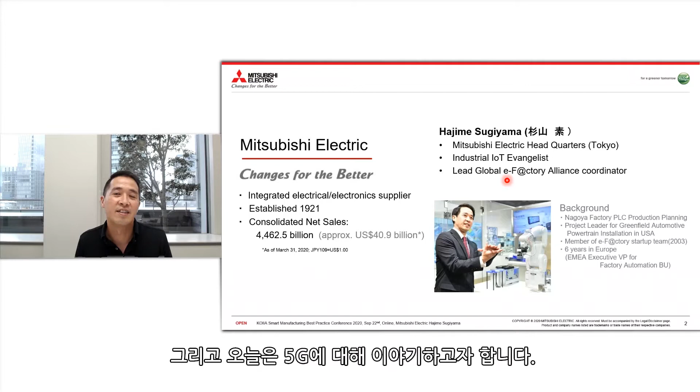First, a short introduction of my company. I work for Mitsubishi Electric, an integrated electrical electronic supplier, and I am from the factory automation division. My name is Hajime Sugiyama. I'm from Tokyo headquarters, and I'm what you call an industrial IoT evangelist. It's my job to talk about emerging technologies and how they impact factory automation, like big data, AI, the cloud, data analytics, and today I'm going to talk about 5G.

I'm sure everybody has heard a lot about 5G and the endless possibilities: wide broadband, low latency, the ability to connect multiple devices. It's really, really exciting, and I think it's going to have a big impact on the factory floor as well.

This is a factory manager's wish list, what he wants to change in the factory. And always, the factory manager has wanted to get rid of wires, because there are so many wires in the factory floor: wires in the panel, wires to the I/O blocks, wires from machine to machine, wires from the machines to the IT servers. A factory has so many wires, it's unbelievable.

And it's not just the installation time, it's also the maintenance time, because when you change the layout of a factory, you always have to rewire them as well. If you can get away with this with 5G, it's a factory manager's dream.

The other dream they have is the self-configuring factory, a factory that thinks by itself. With 5G, the ability to communicate directly to the cloud, where a very, very smart AI is possible. And if that is possible, then a factory manager would not have to think for himself. The AI will figure out the most optimized, best way to manufacture things, and even if a problem occurs, he will be able to solve those problems by himself. So that's why everybody is really, really looking forward to 5G technology.

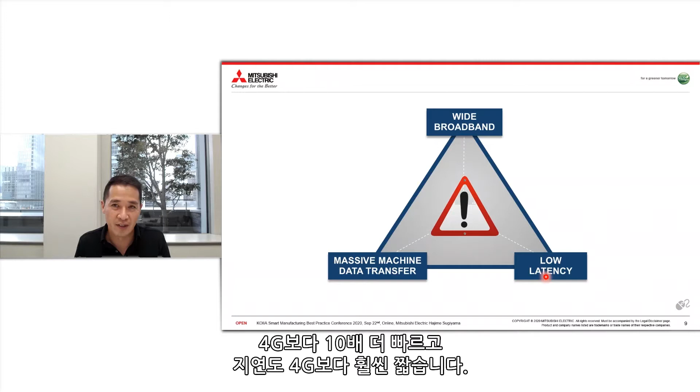I just want to explain one misunderstanding that a lot of people have about 5G. Of course, 5G has wide broadband. It's 10 times faster and low latency. The delay time is significantly shorter than 4G, and it's able to connect to a lot of devices. But the issue is it can't do all three at the same time. It's not an unlimited network, meaning that if you use a lot of wide broadband and low latency for some devices, you're not going to be able to connect to many devices at the same time, because the network capacity as a whole is still limited. And I think a lot of people think you can do three at the same time, but that's not the truth. You can't have it all. You'll have to select between the units that you use 5G and the units you don't use 5G.

And at the end, I think there's still going to be a lot of wiring in the factory. And because of these network issues, I think the factory is going to use what we call hybrid 5G, meaning that inside their factories, they are going to establish their own local 5G network, their own 5G antenna, where they have control. Because in a factory, you don't want interference from outside due to security reasons or due to traffic reasons that might affect the way you collect data or move your robots and AGVs. So you'd like to separate it so you have control of the network capacity. But on the other hand, if you want to connect data to other factories, you want to use public 5G. In that case, we think there's going to be a hybrid 5G, meaning a mix of local 5G networks and public 5G networks.

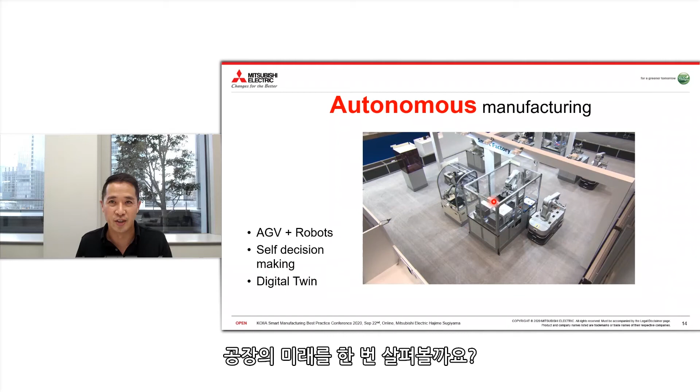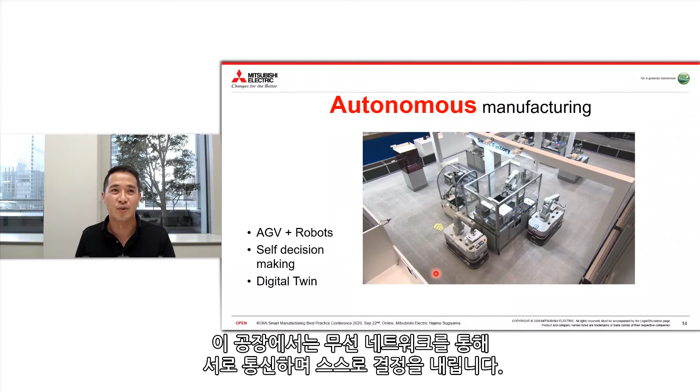Take a look at the factory of the future. This is what everybody has an image of when they talk about 5G. You have robots on AGVs moving from machine to machine. You see no wires between each other, and they're talking to each other through networks. So self-decision making, AGVs and robots, and all of this is copied in the digital twin.

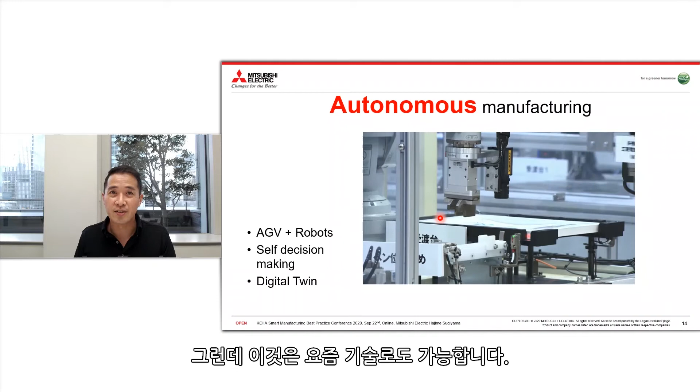A lot of people think, we have to install 5G in our factory, use the latest technology. But first, I want you to wait and ask yourself the question: why are you installing 5G? What is the reason? At the end, in manufacturing, the most important thing is a return on investment. And if it's going to cost too much money to install 5G, it's probably not worth doing it.

I want to go into some use cases of 5G in action so you have a better image of how 5G is going to be used in the factory. And a lot of things you can even start using today.

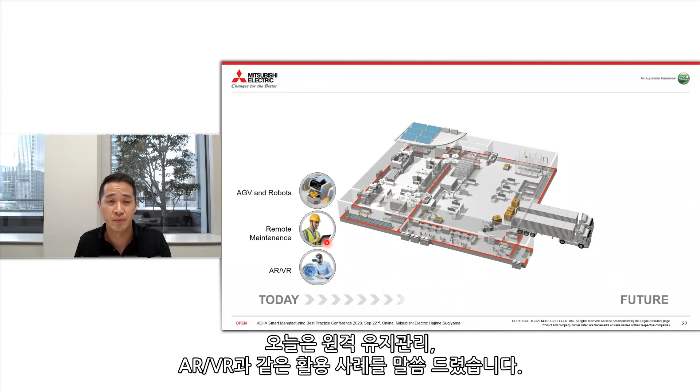But the 5G possibilities are unlimited. Today, I talked about some use cases about remote maintenance and AR, VR. I think the next step is going to be applications like AGV robots and machine coordination, where AGVs are taking the parts from one location, feeding it to other machines or to the warehouse.

And this will be possible with 5G technology. Then the factory managers' dreams will come, where we are not wiring machines to each other, we have wireless control and connection from machine to machinery. And at the end, all these machines will be connected to the smart cloud, and you will have your self-decision-making factory, which everybody has dreamed of.

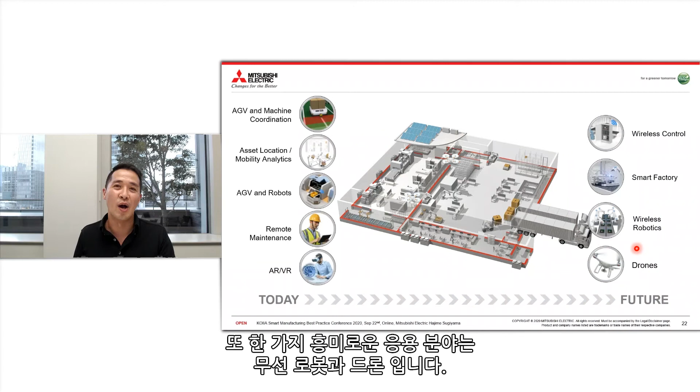One more interesting application, I think, is going to be wireless robotics and drones, which I would like to talk about next.

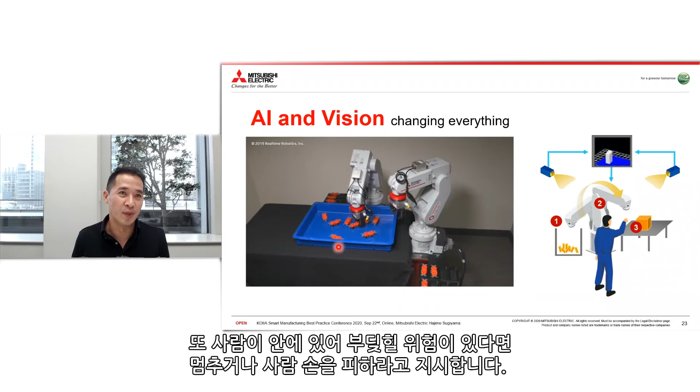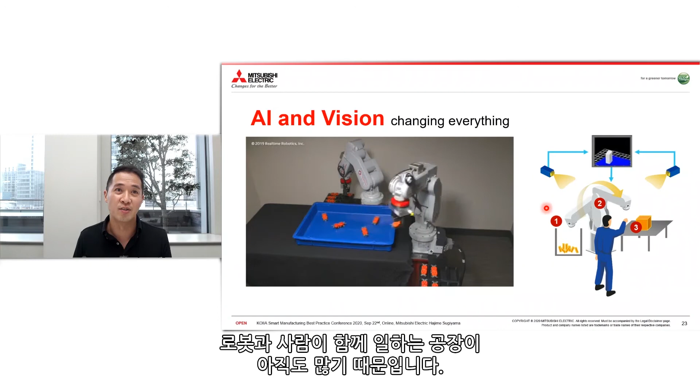AI and vision are interesting technologies, and it's going to change how the factory works. For instance, look at this application. There are cameras here, and it's telling the robot with the vision cameras and AI where to pick up the parts. And also, if a human is inside and it's dangerous to hit them, the robot should stop or avoid the human hand. It's a really good application because still in the factory, a lot of robots and humans are going to work together.

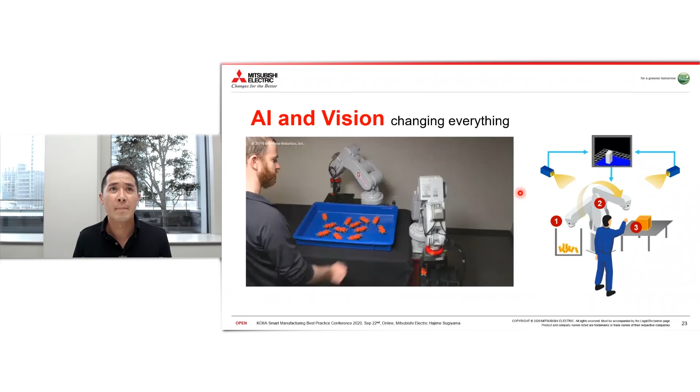But the problem with this application is it can only be done in this place. So if we move it to somewhere else, we're going to have to change it. And that's where drones come in.

In the factory, it's always been the goal to replace a human with a robot. First, you replace the human hand with a robot, then you replace the human legs with an AGV. And the next goal is to replace the human eye with a sensor and AI.

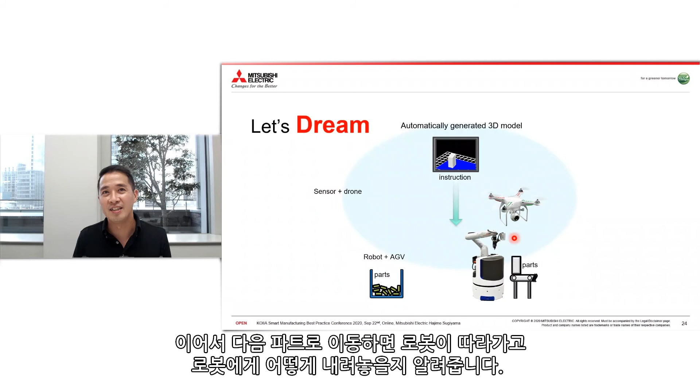If you use a drone, for instance, when you go to this part to pick up things, it will see the model, sense it, and tell the robot how to pick up the part. It will move to the next part, and then the robot will take a shot and teach the robot how to put it down. Go again, and based on the new picture, tell it how to pick up the new part. This is really good technology because all the programs and know-how are in the cloud.

So you only need one robot to do this. In the past, you would need two robots to do this. This is only possible with 5G technology, but when the technology matures, I'm sure we're going to see more and more of these applications.

So 5G is a really exciting technology, and at Mitsubishi Electric, we've also got our own license for the demonstration test of local 5G systems in our Nagoya factory, and we are already starting testing, verifying if this wireless transmission between local 5G base stations and factory automation products works.

In the future, we would utilize this demonstration factory to apply it to various products and applications you've seen today, like remote control, maintenance, and AR and VR.

I think that's the end of my presentation. I just wanted to tell everybody and have them know that, of course, 5G is exciting, but still, it's going to take some time to be installed in factories because of the hurdles.

Imagery applications, high resolutions, we can do this already today. And so let's dream about the endless technologies like the drone and start getting ready.